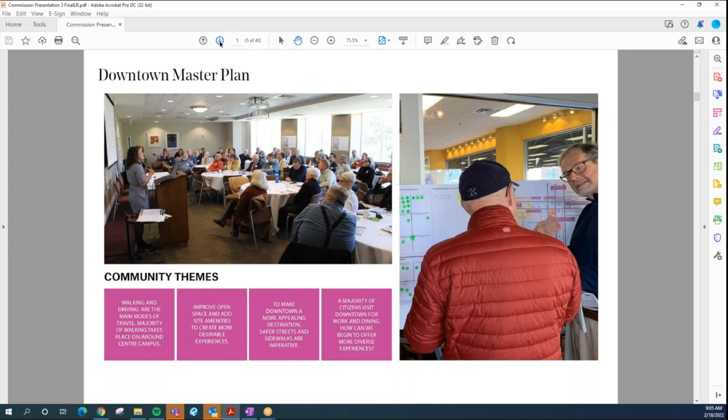A lot of it was about how do we improve our open space, our shared public spaces? How do we create more desirable amenities downtown for people to go to? How do we make downtown more appealing as a destination? Safer streets came up over and over again—people had constant stories about different problems they came across downtown when crossing roads, and we heard a lot about accidents. So people really informed us that they wanted downtown to be a destination, a place where people stayed and walked around instead of just driving through it.

In the master plan, the big themes we created were: connect to people, places, and culture; make streets for people; and infill blocks, lots, and buildings.

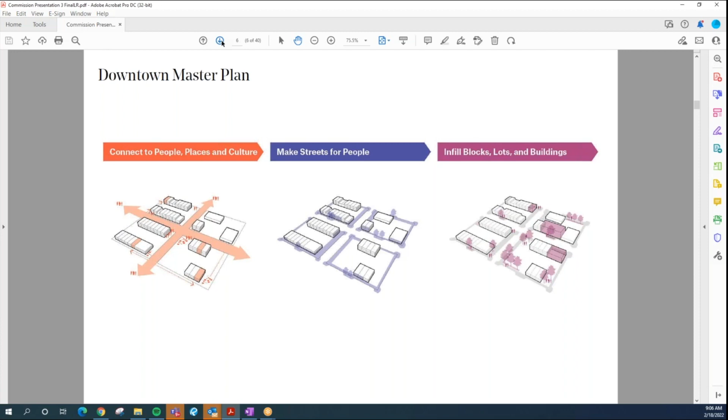One of the three main themes was specifically about making streets for people. Instead of designing roads just purely for vehicular traffic, how do we make sure that public right-of-way also thinks about people in that planning process?

These were some slides that we shared during the downtown master plan, beginning to think about what the main street looks like and how some of those things could be addressed.

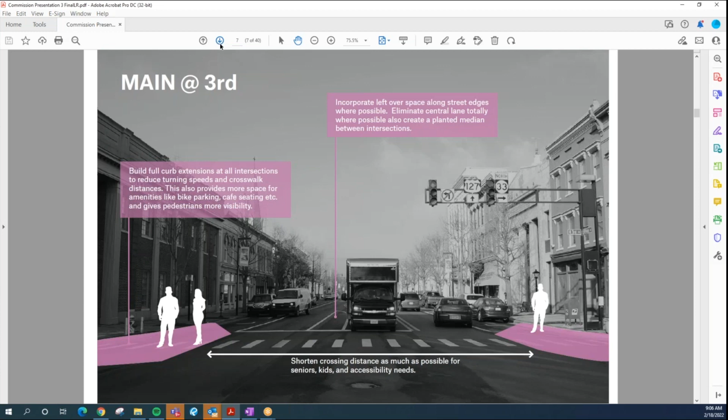Shortening crosswalks to make those street crossings much safer because you're going shorter distances. Bumping out the curbs also allows for people who are waiting to cross the road to be more visible to traffic that's going through and making turning movements.

We talked about bumping out the curbs mid-block as well, so that those places could be long-term parklets, whether businesses could use them or people could use them along the corridor. Incorporating that leftover empty space you see on the striping of the roadway, that space should be put back into the curb area where pedestrians are.

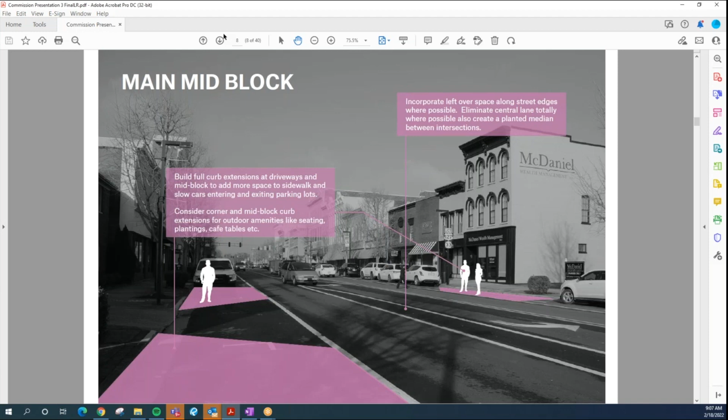And then eliminating unnecessary turn lanes at intersections. We heard a lot about third and fourth intersections being really problematic from a safety standpoint, and also fourth and Walnut as well.

And the traffic crash data we looked at also reinforced that notion that those corners are really problematic, and what do we do to address those? That's evaluating the turning movements that are happening there, making sure that those crosswalks and intersections are safe.

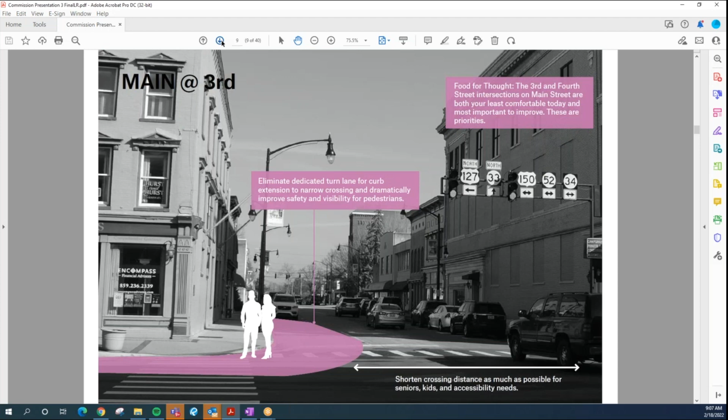So when we started this project, the Downtown Streetscape project specifically, we came up with this original framework for what the plan could be. This has been shared quite a bit throughout the process as our initial take on what we could do for making the streets - bumping those curbs out at the intersections, reducing some turn lanes. So some of those intersections have been changed up just a little bit.

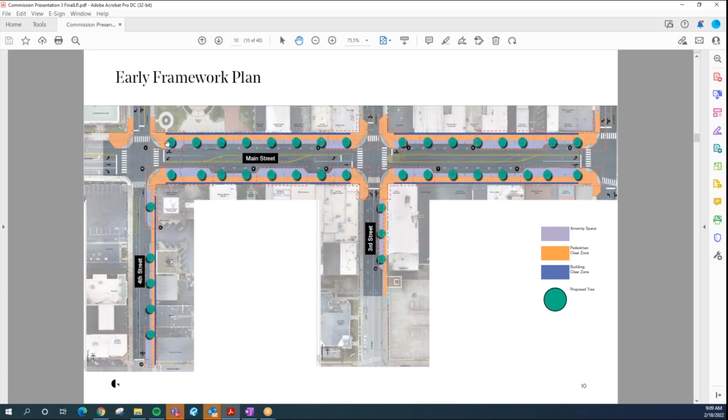We started to talk about, well, where might we see bumping out curbs? Right in front of the Bluegrass Pizza and Pub, there was a temporary parklet there. It seemed to get a lot of support and excitement around that project. So how do we bump the curb out to make that permanent, and where else do we do that along the corridor? This was kind of our first take at where those things could happen.

We took this project to a lot of different groups of people. Our initial conversation was with businesses and property owners along the corridor, and this map you see at the top was a working drawing we had during that conversation where we heard a lot of input from folks. We took the plans also to a public meeting hosted downtown to get more feedback about the framework plan that we showed.

We talked to KYTC the entire time. Early on, we met with them and showed them that framework plan and talked to them about our traffic studies, our modeling if we change these intersections, and how these intersections could be better and safer.

We're doing these curb bump outs to slow down traffic, changing those corners and those turning radiuses so people slow down as they go through downtown, so it's not just a speed zone, especially when we think about 4th Street, that can be pretty fast traffic there. We met with city officials and administrators, folks from the fire and the police, showed them these ideas and these plans, got different feedback.

We also met with the Streetscape Committee and have shared our ideas and our plans with them as well.

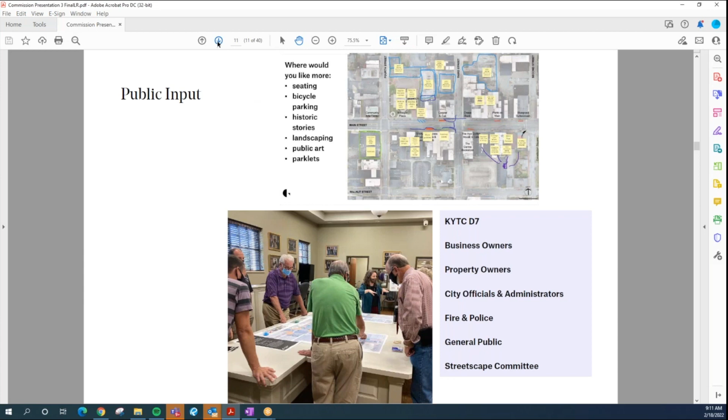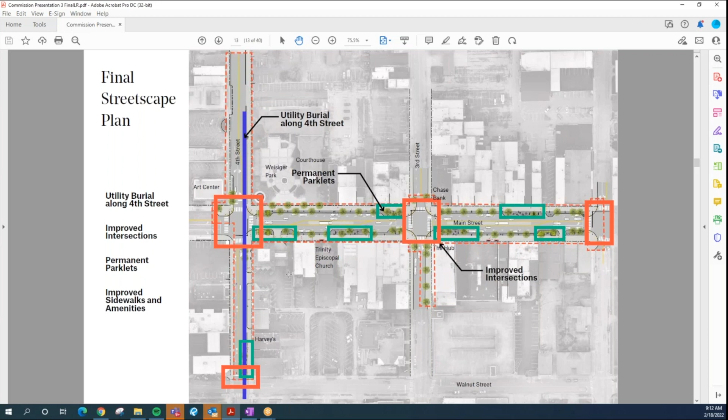And then, of course, all of the sidewalks and amenities will be improved in this plan. So all of the things that are out there today behind the curb will be removed, including the trees, and there'll be new stuff put back in place.

For safety, whenever I presented this to the Planning Commission or City Commission, I had John Eckler with me, the transportation engineer, to talk through these things, but I can summarize what he said. We've been working side by side on this project.

The traffic calming, bumping out at those intersections, really helps cars slow down right at intersections, and helps traffic see pedestrians on those corners. We eliminated any unnecessary turn lanes, which I know specifically on 3rd Street, the dedicated turn lane right now causes a lot of problems with pedestrians crossing Main Street. So we're planning for that.

And there are new traffic poles at each intersection. Those poles will match the style of the light poles downtown, and those will have high visibility signals.

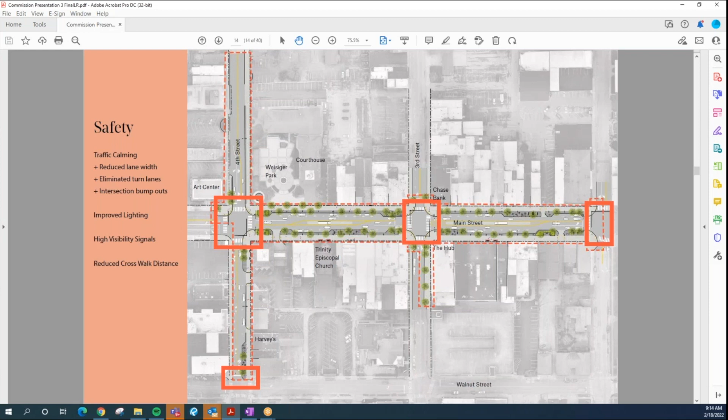We'll do things like pedestrian lead time intervals. So when the signal changes, the pedestrian will get the crosswalk sign first, and there'll be a period of time before the signal changes green to allow the pedestrian to start crossing before traffic gets the go. So those are the traffic things we're implementing to improve safety.

In the proposed project, there'll be 36 spaces along Main Street. But we are adding 3 extra spaces on North 3rd because we're getting rid of that turn lane, and we are adding 6 spaces along South 4th Street as well. So overall, we're losing a net of 11 spaces in this core of the project to those permanent parklet spaces.

The pedestrian spaces are interesting — we highlight the park up here. The park is 21,500 square feet, and the amount of pedestrian space we are adding, in addition to the sidewalks that are out there today, not including those sidewalks, is almost the same amount of square footage as the park.

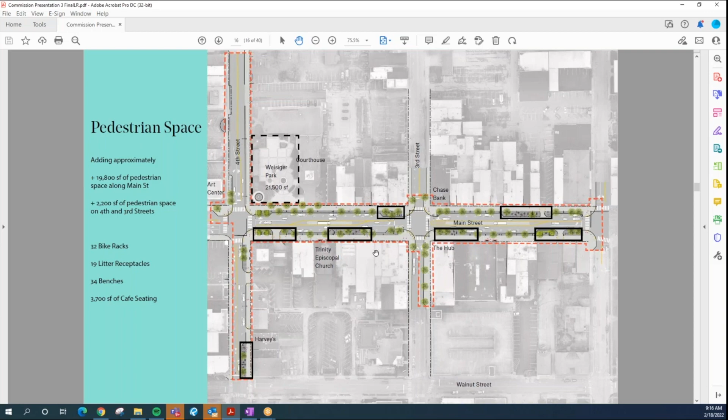Going back to some of the feedback we got during the master planning phase, we're trying to provide safe and accessible downtown spaces. We're trying to activate the streets through providing shade and various lighting, which I'll get into in a minute. We're creating spaces that adjacent businesses could use, pulling the activity happening indoors outside into the public realm, and allowing those businesses to be outside. Hopefully that's an economic driver for downtown, something valuable these businesses recognize could be useful to them. In the end, we're just trying to create a vibrant corridor that people want to walk through, want to visit, want to stay in, and create a lasting experience.

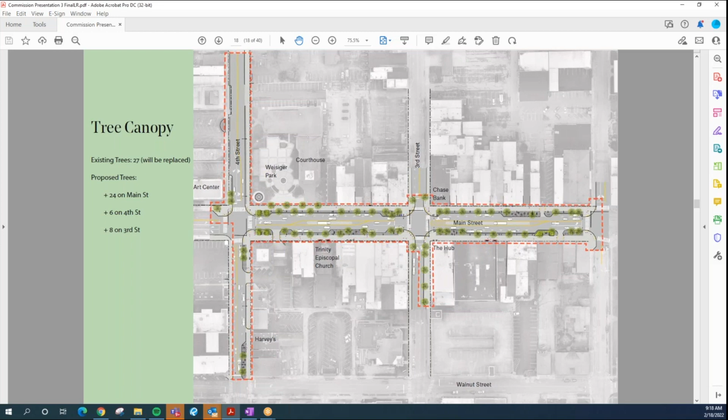From a tree canopy standpoint, the ginkgo trees out there right now would be removed from the project. There are 27 trees out there right now, and we'll be replacing those and adding additional trees. One thing to note is there are no trees on 4th Street right now, but we're excited to be adding trees on 4th and some on 3rd as well.

So here as we zoom in again, this is right in front of the park. This is what those tree spacings would look like, about 40 feet on center. Depending on utilities, of course, sometimes those get in the way of existing utilities, so we're making sure we're planning for that.

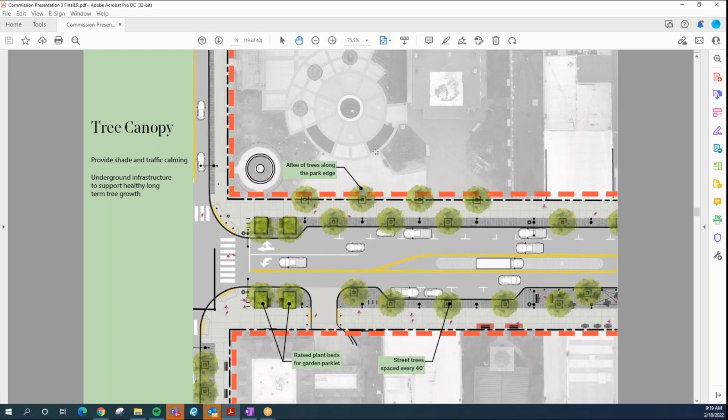In addition to the trees, we are planning for infrastructure below ground. We're using soil cells around the tree roots that help the tree grow long term. We're also suggesting tree species whose roots do not push up the sidewalk. What you see today, those ginkgos are pushing up sidewalks and creating challenging accessibility problems out there. The species we're selecting are resilient to urban conditions—heat, concrete, salt—making sure those trees will be healthy long-term so they last a long time.

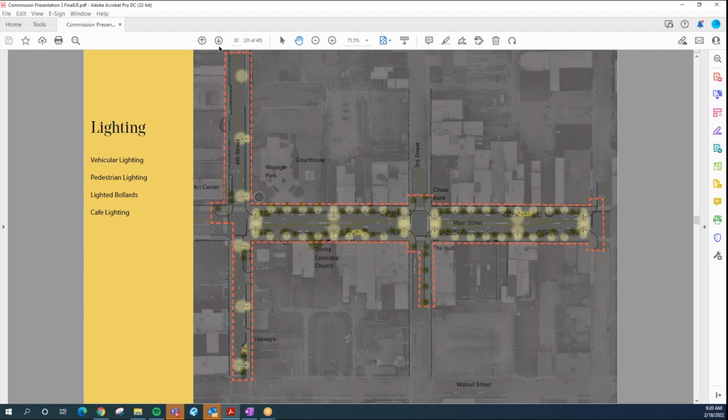Lighting is a big piece of the project. We want to make sure the space downtown is active not only during the day but at night as well, that people feel safe down there and that it's exciting and vibrant. So we have a lot of different lights we're suggesting. Vehicle lighting is important to make sure the roadway is lit from a safety standpoint and that pedestrians crossing the street are very visible at night. We also have pedestrian lighting along the sidewalks, bollards that are lit as well—those short lights along the edges of the sidewalks for safety—and cafe lighting too in certain spaces, overhead little cafe lights that I'll show you a picture of in a minute.

So if we zoom in, this is what that looks like. Right now we have the pedestrian lights between the trees, at about a 40-foot space interval, and the vehicular lights at the ends of the blocks and also at the mid-blocks. We've done photometric lighting to make sure this is all safe and designed so the roadway will be lit. Here's an example of the cafe lighting over certain bump-out areas and parklets—not all of them receive that, because we're trying to provide a variety of spaces. The cafe lighting space would be a very bright, active spot at night, while other spaces with just bench seating might have lower pedestrian light, providing a variety of experiences in the corridor.

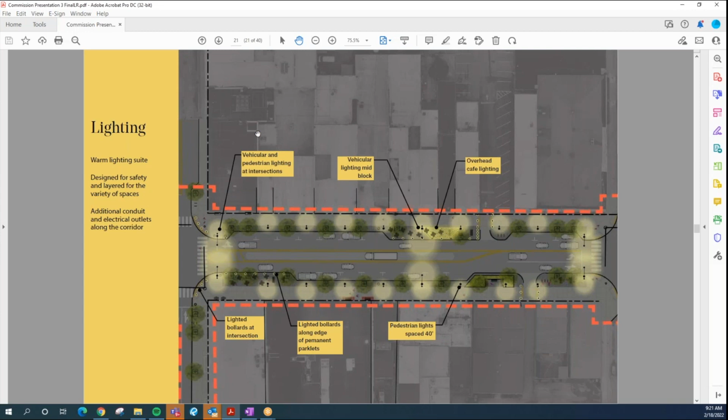When we started to think about the materials for the project, all of the stuff talked about—the curb, the spaces, the lighting, the trees—is just the framework, but what about the pavement itself? We thought about the goals of that pavement. First and foremost we want to think about accessibility; we know there are issues downtown right now with some of these bricks being loose and causing problems long term. We want it to be timeless and sophisticated—this core downtown, these two blocks, are very special, with beautiful historic architecture and building facades we don't want to distract from. We want this space to complement those and set the stage for the architecture to shine. We also want to think about long-term durability.

We're putting a lot of effort and a lot of money into this project, and we want it to live up long-term, something that the city can easily maintain. So we're making sure that the decisions we're making, we think about maintenance. And of course, we want the spaces in the end to be vibrant, something that people are excited to be in and feel comfortable at.

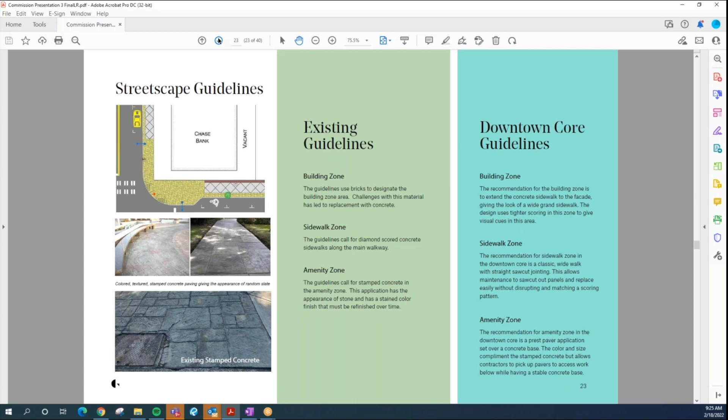So what does that look like when we take a picture looking down on the streetscape? We have the 3 feet of the building zone right up next to the building — you can see tighter scoring joints in the concrete. Then we have the 10-foot sidewalk that's clear from anything that gets in the way, and that goes all the way to the crosswalks in our scenario, so there's an accessible walk as you walk through the core. You'll never have to walk over pavers unless you walk into the parklet areas.

Where there is parking still along Main Street, there would be a 6-foot standard amenity zone where light poles, trees, and waste receptacles would go — that's all in pavers, off to the side of the main sidewalk. Where we bump out for permanent parklets, that expands to almost 14 feet of space outside the pedestrian zone. In this example we have a couple of benches facing each other, and bollards along the edge of the sidewalk that are lit to help people feel a separation between traffic and the space on the sidewalk.

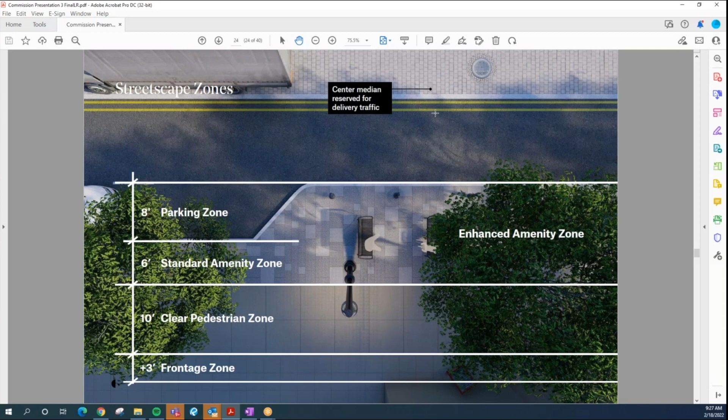Another item we heard over and over from people was that the center median reserved for delivery traffic — everybody loves that. It's working really well for everyone, especially the businesses downtown. So we've kept that in place, and what we've proposed is replacing the asphalt of that median with a paver that complements the pavement behind the curb, breaking up the asphalt and providing another level of texture and visualization in the core that we think will be really timeless and beautiful.

So if we zoom in on that amenity zone, this is what that pavement pattern looks like. It's a linear European pattern with really light gray, subtle textures to complement the concrete sidewalk. The approach here is to be almost a neutral zone on the surface to let those beautiful, colorful architectural buildings shine. We don't want to overwhelm this corridor with lots of color and introduce other materials.

We felt like it was best to have this neutral color that will complement those buildings. Of course, we're suggesting granite curbs along the face of the sidewalk, really a timeless element that will hold up and be able to be reused forever.

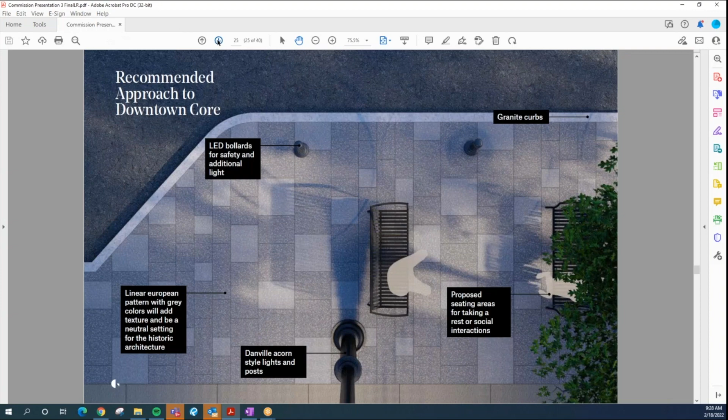So again, I'm going to show a couple of renderings of what these spaces would look like. I wanted to remind everyone how beautiful these buildings are and what that backdrop for these spaces would be. I'm showing you this because in our renderings we don't have the ability to drop those in, but just imagine those beautiful, colorful buildings behind these spaces.

This is kind of what looking across the street at a permanent parklet might look like with cafe seating. You have the cafe lighting in certain areas, and trees to provide shade. Those trees are species that have high limbs, so the trunks grow really tall before they start limbing out, rather than hanging down, to provide that sort of space below them to see signs and businesses' facades.

We also have these social areas again with seating in the shade and the lights. Here's the permanent delivery median with the different pavement treatment as well.

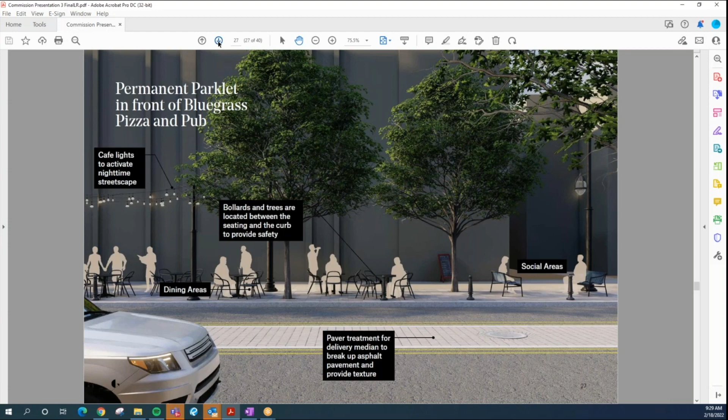And we just kind of rotate and look back. Our backs to the building right now, looking out towards that street and that streetscape, and what that would look like during the daytime. Again, this is what it looks like today out there, and here's what it could look like in the future.

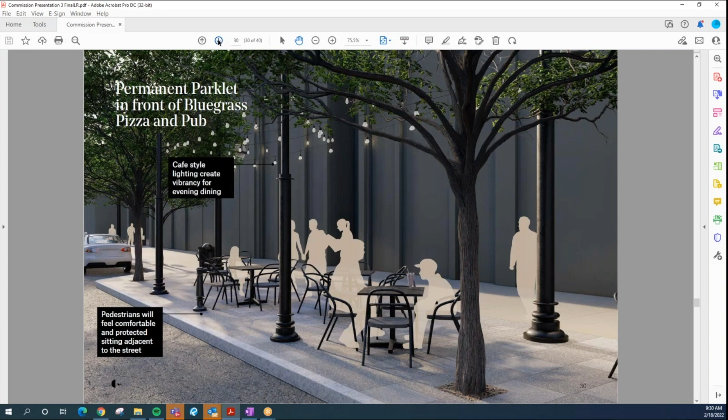And here's another instance right at the corner of Main and 3rd Street, and here's what that might look like in the future.

Again, we are bumping out at these intersections, providing bollards along that corner to help protect those pedestrians. We'll have new pedestrian crosswalk signals and all the amenities a streetscape will need, like trash cans. We're working with all the utilities to make sure existing utilities are maintained. Fire hydrants, for example, will need to be moved out to the curbs where they are, so we've worked with them to make sure those are planned for the future.

Again, here's another look at that. One thing I didn't mention when talking about lighting: we're also providing outlets at every tree and conduit running underground. That way, in the future, if there are different changes the city wants to implement, they can tap into the conduit and introduce new technology as we think about the future.

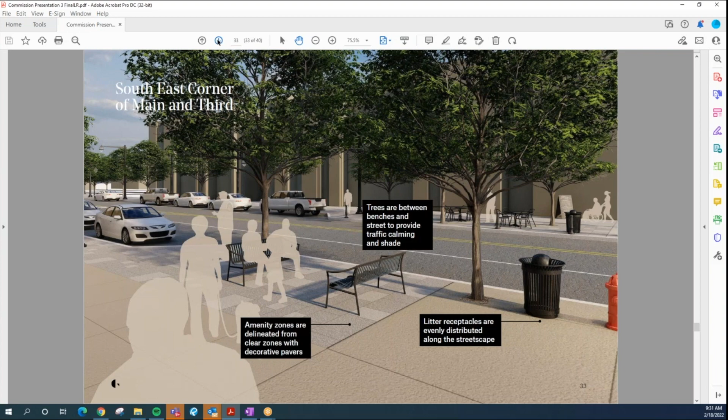Other streetscape components we saw in the renderings include litter receptacles and benches that are prescribed in the Danville streetscape plans.

Here's what that cafe lighting looks like. This is at the Arts Center right now, showing what those lit bollards will look like.

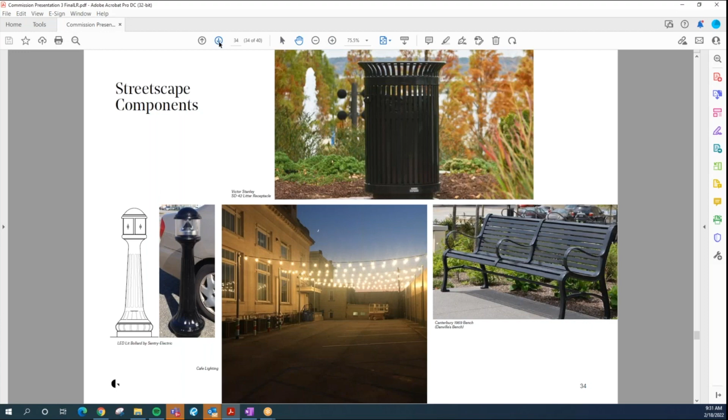Again, on planting, I mentioned this before, but we're specifying trees that are urban tolerant, meaning they can live when salt is thrown on them. We're supporting them with infrastructure for a healthy life using soil cells. We're also thinking about seasonal interest and of course high branching patterns.

So one of the main things you all are probably interested in hearing about today is the maintenance of traffic and what the construction phasing will look like when this all gets built. So I have a couple of diagrams to walk through to talk about the plan.

We've worked really closely with Josh and his team, thinking about it with other stakeholders, about how we could do this. This isn't a really large project in comparison to some of the other projects we've worked on. For instance, in Lexington, we've been working on Town Branch Commons, which is 2.2 miles of corridor right through the middle of downtown. So we think this project could happen fairly quickly.

All of the things we're suggesting here are recommendations to the contractor that will be put in our documents to them, but ultimately we'll work with them. If they have suggestions to do it better, we will review what they suggest and possibly change this. But this is our recommendation based on our experience and knowledge of how construction can happen.

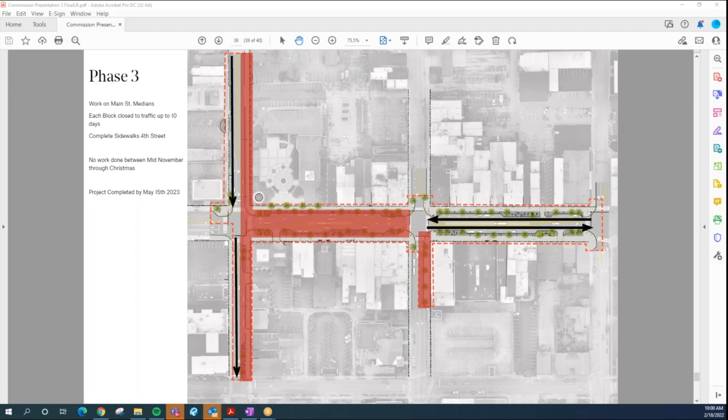Yes, I just want to jump in and say I agree with Carol. That's my biggest concern, that we are losing 20 spots in a 2-block area. And I will tell you, as we do a lot of large custom framing, that is going to put a huge strain on our business, because people are not going to walk a piece of framed art all the way around to Broadway.

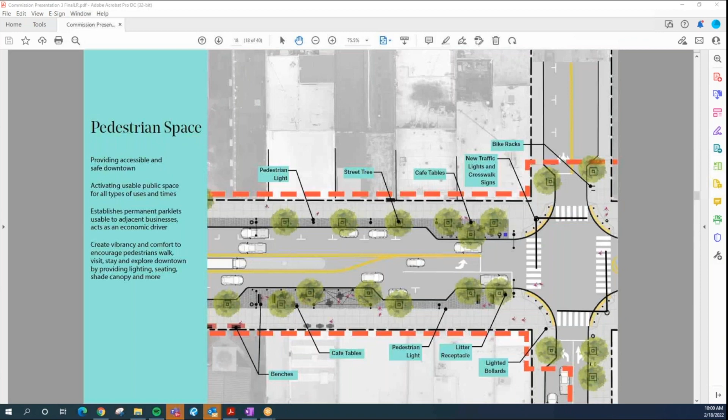That's right, Julie. They're not going to carry 10 tuxedos out of here and have to walk that far. No. So 20 spots on a 2-block area, to me, is a real detriment to our retail and our businesses downtown.

So who will those conversations include whenever it comes time for parking? Is that a meeting with Bridget Lester? What does that look like? I know that when you guys came around on Friday, you said we'd talk about that in detail later, but that's going to be the huge driving factor here. Generally speaking, I'm a team player, but if you take all our parking and then complain that our employees are parking in certain areas when there's nowhere for anybody to park, that's going to put business owner against business owner, and that's not the kind of community we want. There's got to be a real conversation had real soon.

Yeah, it'd be with Bridget. I'll bring in Bridget, and police probably needs to be involved too, just because they have a good mindset about this. They're going to be dealing with it on weekends. So I'll bring them in, we'll start the conversation, and then talk to you all, because you're the ones that deal with it every day, and see what a good solution is. Yeah, we need to have that soon. You're right.

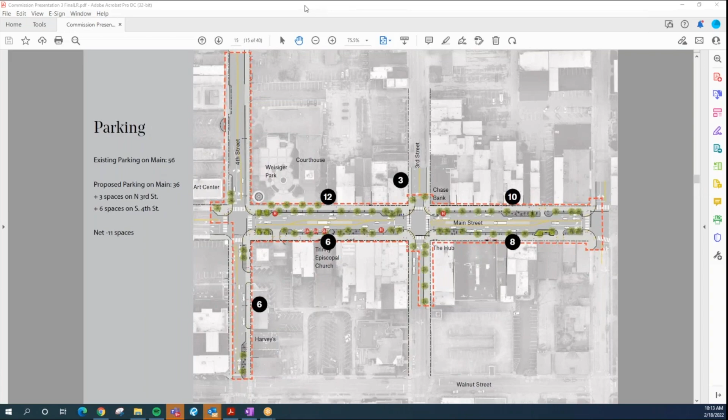You know, I know we're not going to get everything right, and there's different ways to go about this process, and not everybody's always going to see the same thing, but we all have the same goal. And I want y'all to know that, and just always feel free to come down here to City Hall and talk to me, really, or call me and tell me, come up there and talk to you. I'm not that far away.

So I'm definitely willing to stop by and see you if you have questions. And this parking thing is something I've thought a lot about, but like I said, I need to get other folks involved to figure it out. Because it's something that really does drive your downtown economy, is how people can access places. And I know we got to focus on pedestrians, but at the end of the day, people do drive. They drive places. Everybody uses their cars, so we got to accommodate that as well.

So I appreciate everybody being on here. Yeah, I'll get with our folks here about parking, in short term and long term. Short term for construction, long term for what this looks like after we're done. Because like I said, my dream is that people are flocking to our downtown after this project's done just to see it. And parking will be a problem, and we've got to solve it.

So thank you all for hopping on here this morning, and letting us know what's going on. I'd like to add to, yeah. And I guess I'm getting some feedback, and I apologize. I'll just send an email to everybody.

Okay, so I'm with the Heart of Danville, and I'm going to be working very closely with Josh, because he's going to be busy through this whole project. But again, I'm going to be sending emails about this project as it moves along and how it will directly affect you before it becomes time to affect you. And I'm talking about weekly and possibly daily, for that matter.